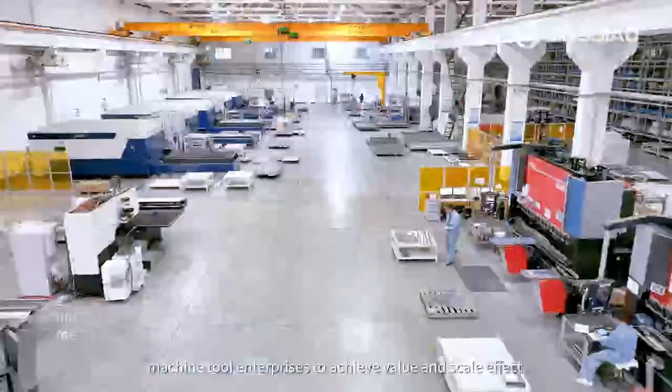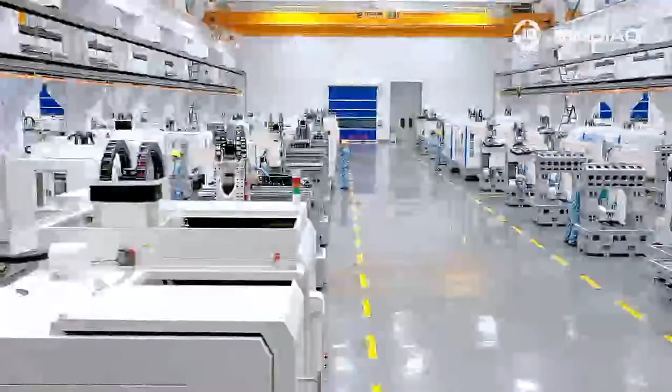Manufacturing capability is the most crucial factor for machine tool enterprises to achieve value and scale effect. Beijing Jingdiao has built large-scale precision CNC machine tool production bases with lean manufacturing capabilities in Beijing and Langfang, capable of producing 2,000 to 3,000 medium-sized Jingdiao high-speed machining centers and 3,000 to 5,000 medium cutting Jingdiao high-speed precision motorized spindles annually, which guarantees its rapid response to market demand.

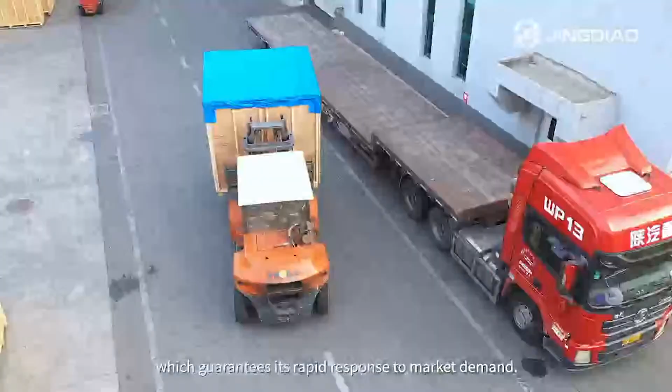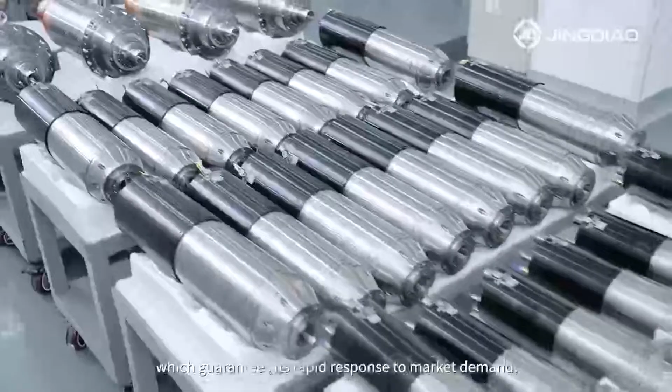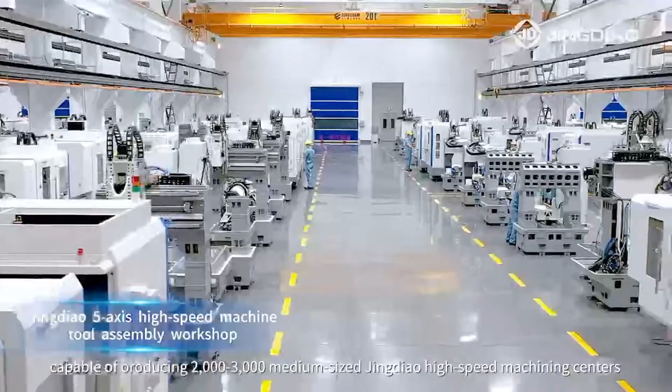Manufacturing capability is the most crucial factor for machine tool enterprises to achieve value and scale effect. Beijing Jingdiao has built large-scale precision CNC machine tool production bases with lean manufacturing capabilities in Beijing and Langfang, capable of producing 2,000 to 3,000 medium-sized Jingdiao high-speed machining centers and 3,000 to 5,000 medium cutting Jingdiao high-speed precision motorized spindles annually, which guarantees its rapid response to market demand.

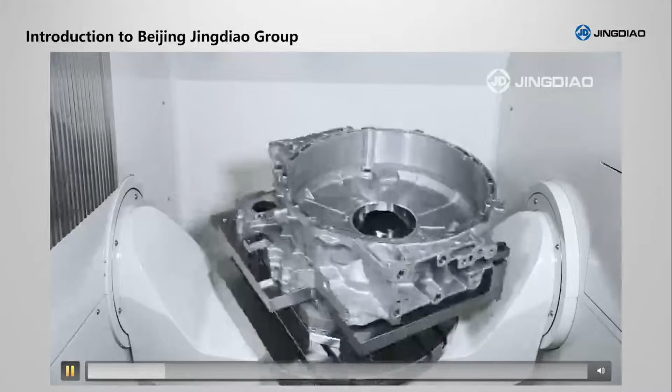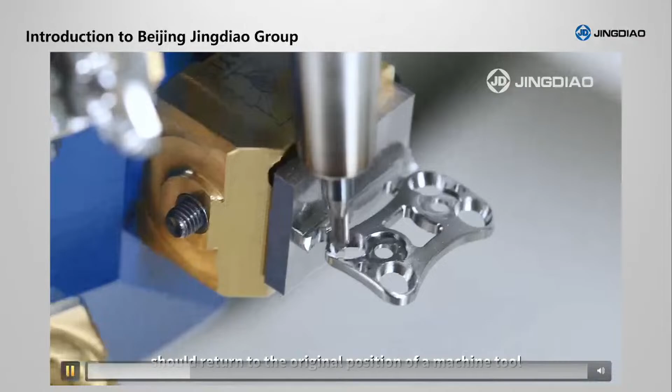As a manufacturing enterprise, Beijing Jingdiao is not an exception. Over the past 30 years since its establishment, it has always insisted that product development should return to the original position of a machine tool, a tool used for machining parts, and that it should focus on the original needs of customers, to be able to deliver on time, with quality and quantity. By providing customers with high-precision CNC machine tools and comprehensive CNC engineering services, it promotes the better development of both customers and the whole industry.

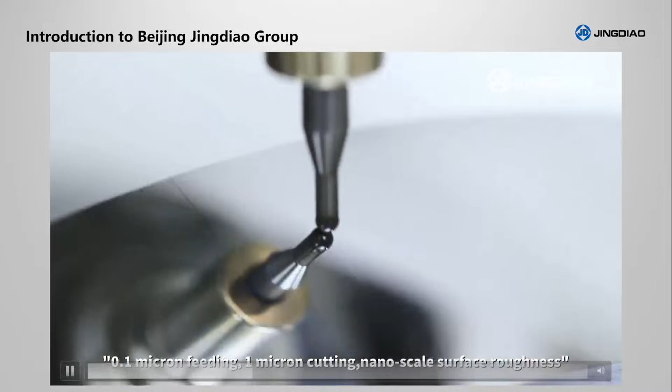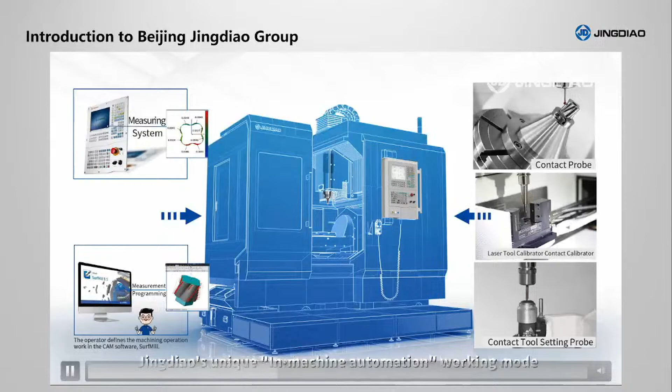Jingdiao precision CNC machine tools can stably achieve 0.1 micron feeding, 1 micron cutting, nanoscale surface roughness, to meet the needs of micron-level precision parts processing. Jingdiao CNC engineering services are based on Jingdiao's unique in-machine automation working mode, and provide mature CNC engineering solutions according to the needs of customers inside the industry.

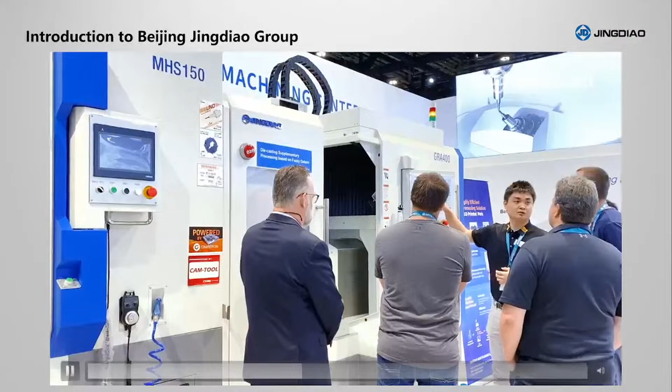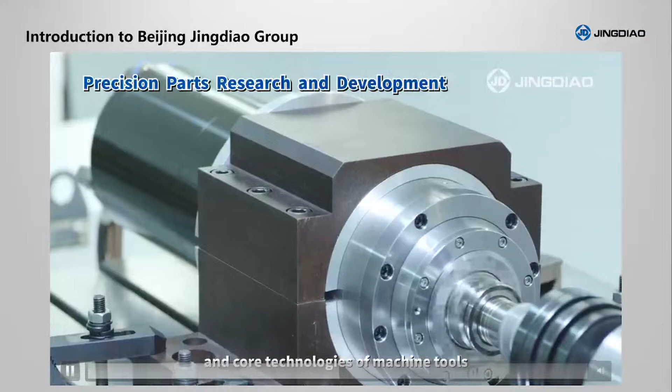In order to achieve the above goals, over the past 3 decades, Beijing Jingdiao has established a product R&D system that is close to the needs of customers, independently completing the R&D of key core components and core technologies of machine tools, and realizing the integration of electromechanical software.

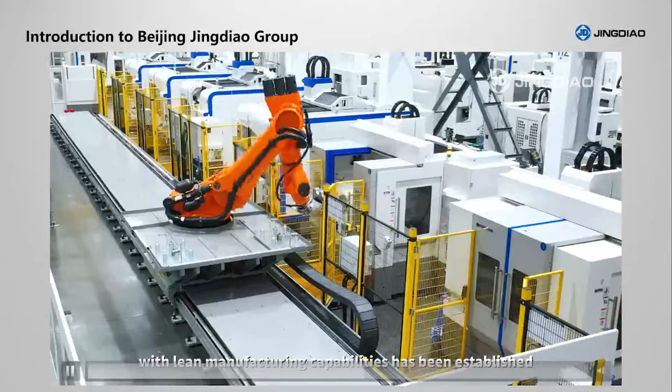A large-scale production system with lean manufacturing capabilities has been established, with a precision CNC machine tool production base of over 500,000 square meters. The machine tool host and key functional components are produced by self-developed equipment, with manufacturing and assembly accuracy controlled at the micron level.

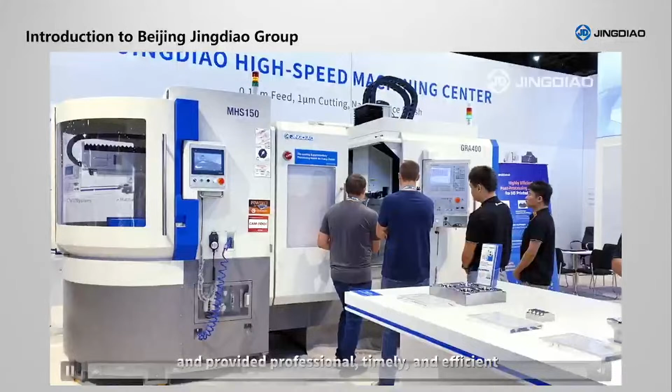We have helped customers make good use of the application technology service system of Jingdiao machines, established a technical service team of over 1,200 people, and provided professional, timely, and efficient technical services to customers at home and abroad. The human resources system of digital technology application is supported, and we have accumulated over 20,000 talents who master digital technology for the industry through independent education, school-enterprise cooperation, and hosting industry competitions.

Nowadays, Jingdiao high-speed machining centers have achieved large-scale application in the Chinese machining industry, helping manufacturing enterprises truly achieve micrometer-level parts large-scale and efficient processing.

Mountains and seas are not really barriers for sincere cooperation. In the future, we hope to work together with our European manufacturing partners to contribute our share to the development of the industry. Let's connect the world with precision machining. Join hands to create a brand new future.

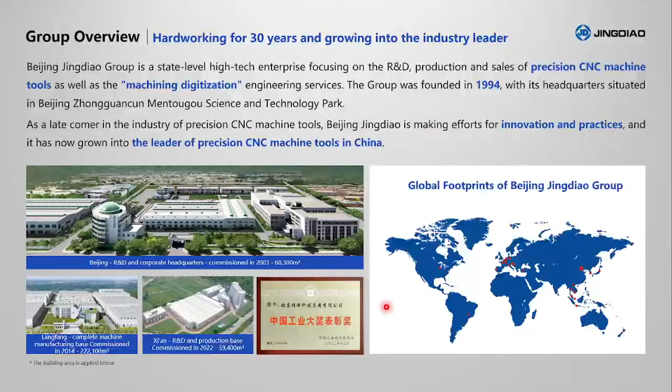These achievements are the result of 30 years of hard work since 1994, when the company was founded. Back at the foundation of the company, our first product was a CNC engraving machine. There is a small story I'd like to share with you related to why we developed the engraving machine. This story also lays the foundation for the development and business philosophy of our company.

We can also tell from this story what makes Jingdiao special and what advantages we've benefited from since the beginning. This story happens in the period of China's reform and opening up. I can only tell you this story orally because we don't have any pictures or videos, as back in that time in China, we Chinese people didn't use smartphones to record our daily lives. So we don't have any pictures or videos about this product or the company's history. So let's get back to the story.

At that time, in order to boost the Chinese economy, private individuals were allowed to operate businesses. The founder of Jingdiao was working in the field of precision machinery industry, yet his job was software development, as he had studied computer science and software engineering in university. Every time he developed a new piece of software, he needed to wait for the corresponding circuit board to do the experiment.

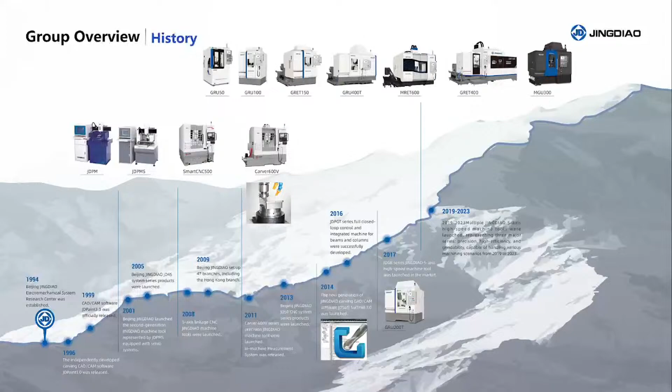The main products of Jingdiao are Jingdiao Precision CNC Machining Centers, including Jingdiao High-Speed Machining Centers and Jingdiao CNC Machining Centers, both of which are independently developed by Beijing Jingdiao. So far, we have launched more than 300 models on the market, with over 10,000 customers holding 120,000 units of Jingdiao machines. The products are widely applied in precision molds, precision parts, 3C structural components, medical devices, automotive electronics, and other industries.

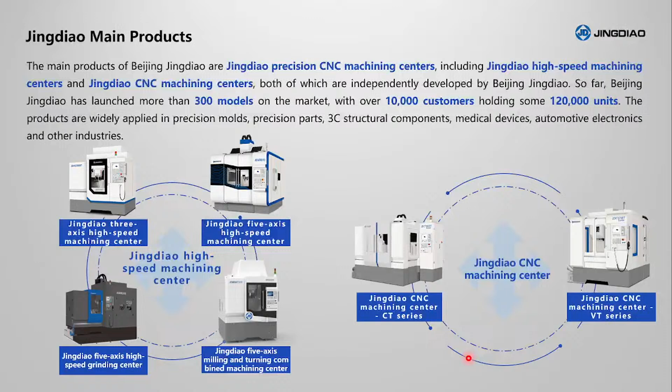The company boasts independent intellectual property rights of all of them and has realized mass manufacturing for these applications.

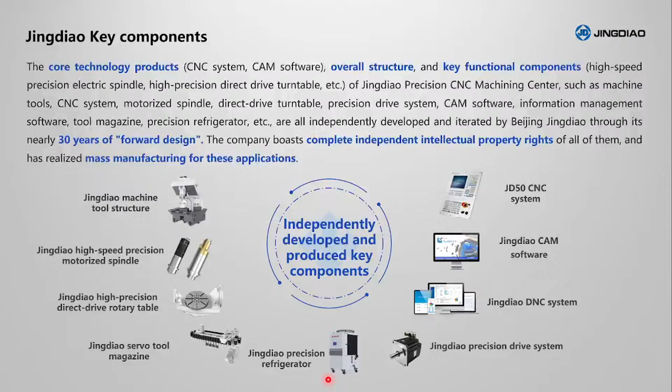Based on the complete R&D system covering mechanical, electrical, and software aspects, Jingdiao has formed two outstanding advantages. The first one is the machining accuracy of Jingdiao high-speed machining centers can stably reach micron level. This video shows some test parts that can be batch produced by Jingdiao high-speed machining centers. Let's watch the video first.

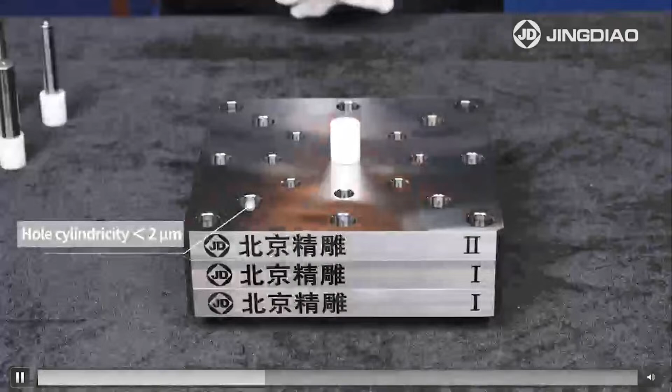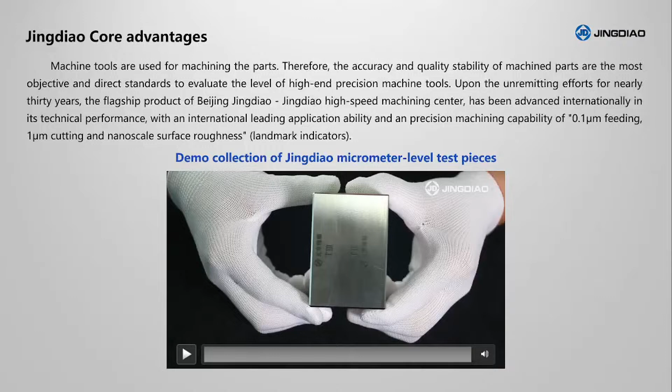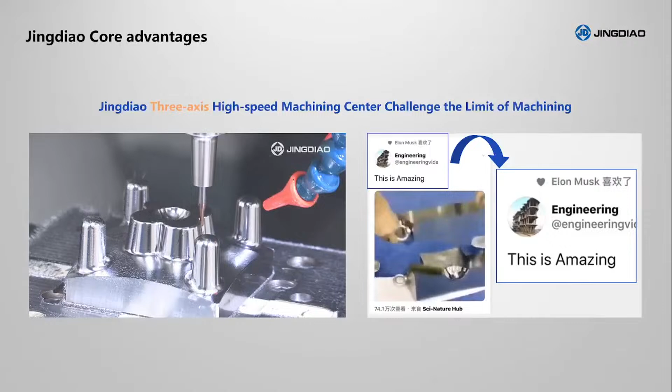I'd like to introduce the following two parts in more detail. The first pair of parts are machined in Jingdiao 3-axis high-speed machining centers. First, let's watch the video.

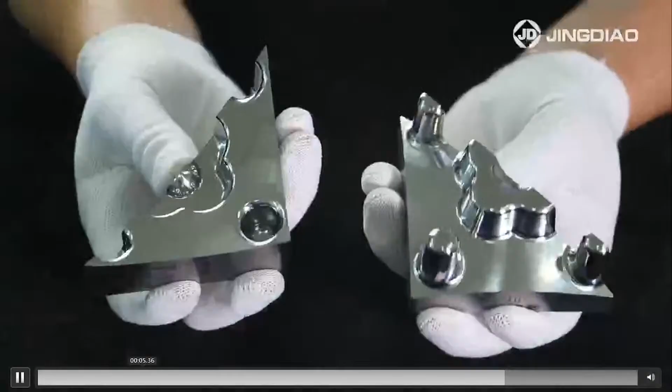We can tell from the video that this is a pair of parts made from a concave part and a convex part, and each pair can fit in 4 directions, and different pairs can fit interchangeably, also in 4 directions. When we cut these two parts along the diagonal, the two parts fit seamlessly, as the fitting accuracy is less than 5 micron. This test part can be batch produced with Jingdiao 3-axis high-speed machining centers.

The video went viral on Chinese social media, watched more than 10 million times. When we posted the video on foreign social media, it also won likes from some really famous people.

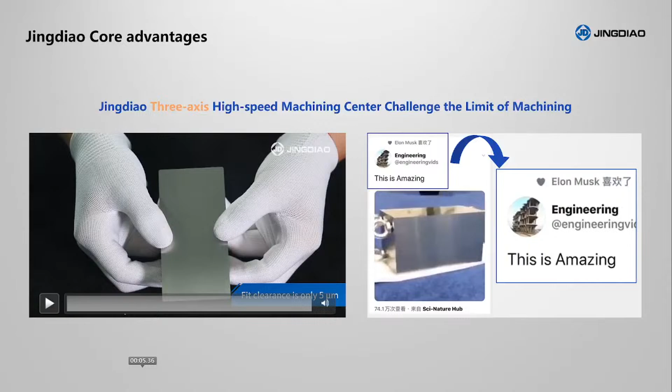The next pair of parts is also seamless fitting. What's different from the first pair is these two parts are machined with Jingdiao 5-axis high-speed machining centers. Let's watch the video.

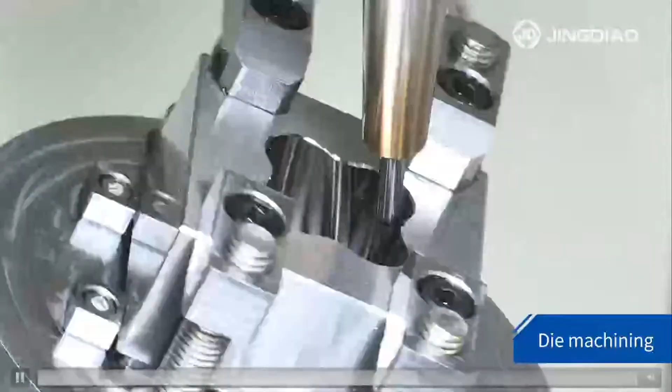We can also tell from this video that the parts are combined from a concave part and a convex part. A single pair can fit in 4 directions, and different pairs of these parts can fit interchangeably as well. The fitting accuracy between these two parts is 5 micron.

In order to prove that the fitting accuracy is only 5 micron, we also did a small experiment in this video. We fit these two parts together and then put them on a non-magnetic part. Because the fitting accuracy is only 5 micron, it creates a vacuum space between the two parts, and it can lift a non-magnetic part, showing that the fitting accuracy is really precise.

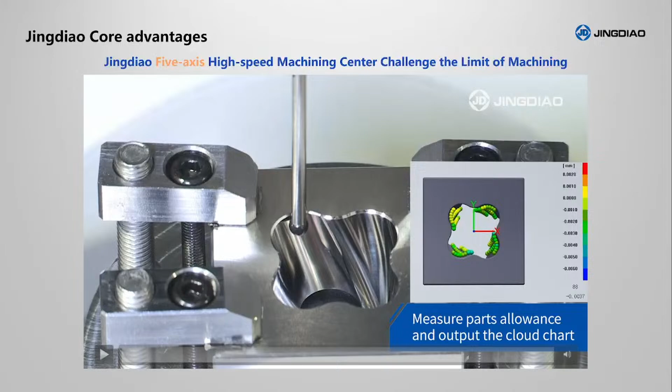So these two pairs of parts are the most vivid examples of the micron-level machining accuracy of Jingdiao high-speed machining centers, and this is the first advantage Jingdiao machines have. As for the second advantage, it's quite unique, and we're very proud because only Jingdiao can realize it.

Before the introduction, I'd like to invite you to watch a video first.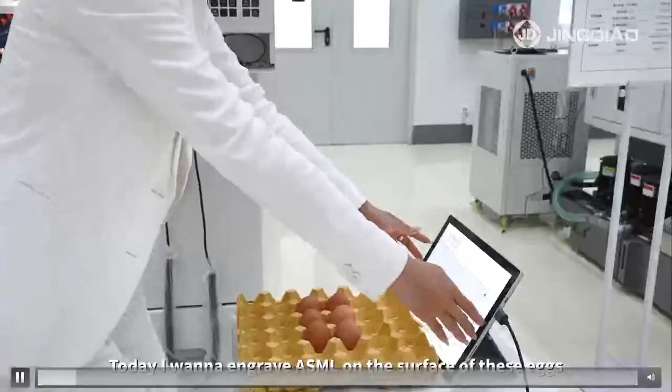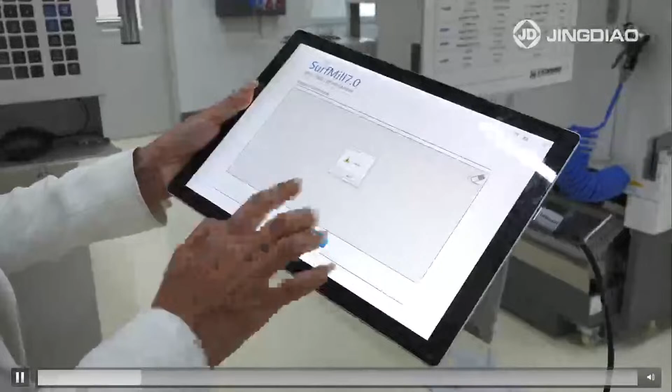These are eggs I just bought from the market. Today I want to engrave ASML on the surface of these eggs. First, I will write down ASML in the software and press this button to generate the NC program. Now the program is in the control system. I will randomly select an egg and clamp it in the machine tool.

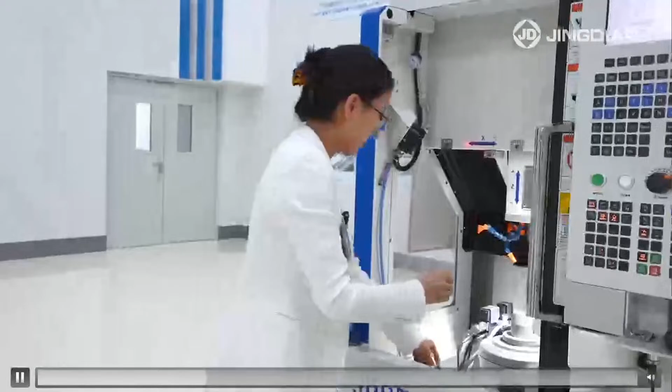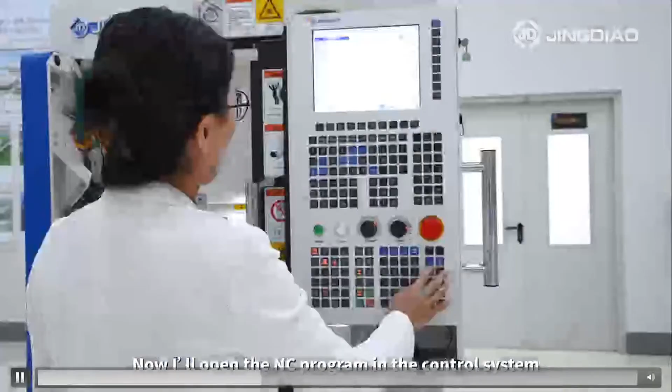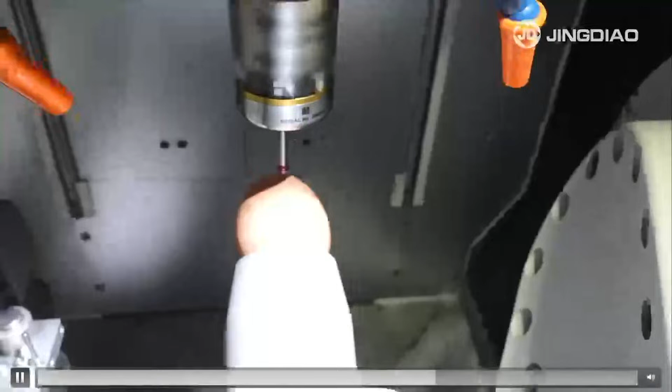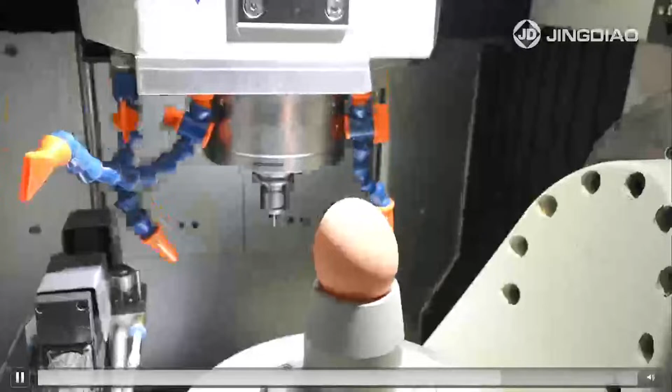Now I will open the NC program in the control system. Press the start button. Now let's wait a few minutes. The egg will be finished. Now the egg is finished. Let's see how it looks. ASML has already been engraved on the surface of this egg.

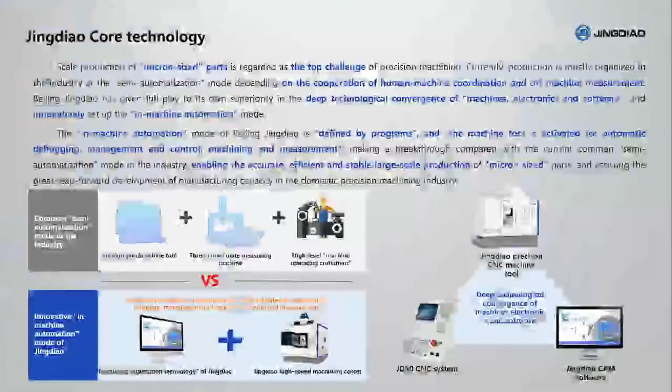In this short video, we are demonstrating Jingdiao's IM technology through a very interesting case, egg engraving. If we replace the egg with precision parts, this technology also works. We will introduce this technology in detail tomorrow. What we want to show today is based on this technology, a unique machining mode introduced to the precision machining industry. We call it Jingdiao in-machine automated production mode.

The reason why this mode is essential for the market and customers is we notice that in precision parts machining, machine tools are not cutting continuously, as a lot of work needs to be done by the operator. For example, setting the coordinate of the part, measuring the part's dimensional accuracy or allowance, setting the length of the cutting tools, and compensating the radius of ball-end cutting tools if you want to realize micron-level machining.

This work not only influences continuous machining, but also affects the accuracy of the parts, because in precision machining, the environment in the machine needs to be quite stable. Based on all these reasons and the comprehensive R&D system Jingdiao has, we introduce the in-machine automated production mode to our customers' workshops in the precision industry.

This mode, as I just mentioned, is based on Jingdiao IM technology. Customers can define all the works I just mentioned in Jingdiao CAM software, as we can see here. Jingdiao control system will give instructions to the sensors we installed in Jingdiao high-speed machining centers.

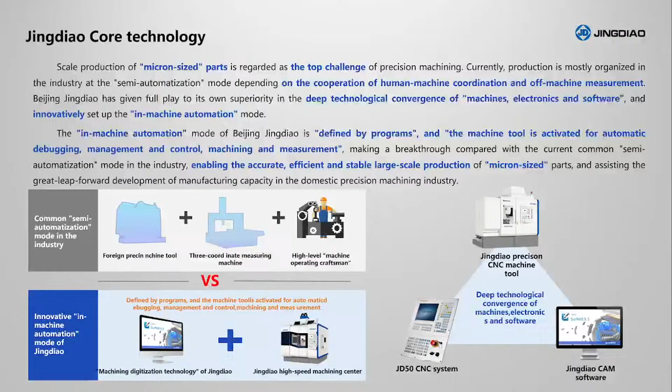Thus, in precision machining, the operator only needs to fix the part in the machine tool, press the start button, wait for it to finish, and unload the part. The whole machining process is automated. The working rate will increase, and the environment in the machine will not be affected by human factors, so that large-scale production of micron parts can be achieved.

With Jingdiao high-speed machining centers and its in-machine automated machining mode, we have over 2,000 customers in 30 precision machining industries, and over 60 leading enterprises in these industries use Jingdiao high-speed machining centers. These customers are the basis we can develop sustainably. These are some industries using our high-speed machining centers, and some really famous customers from each industry.

Beside the recognition from our customers, to promote Jingdiao's development and provide high-quality machine tools to our customers, we have already built our own industrial system, including R&D, manufacturing, and service system.

First, let's take a look at the R&D capabilities of Beijing Jingdiao. The outstanding R&D capabilities is definitely the driving force for the continuous development of a company. This is also the reason why we built a comprehensive, independent R&D system covering core technologies, complete machines, and core components. Now we can launch more than 5 new machine tool models every year.

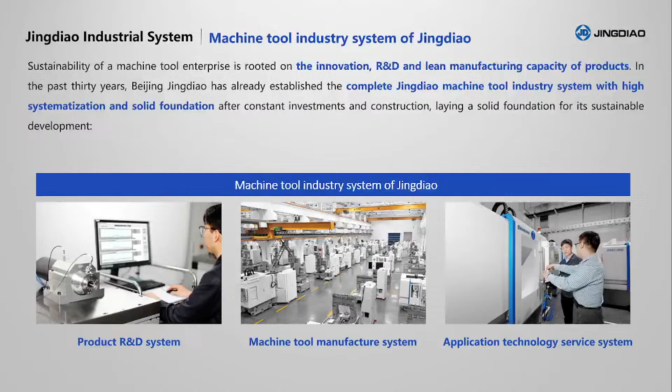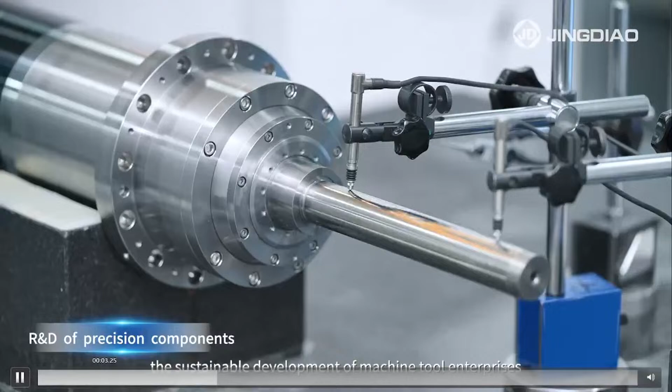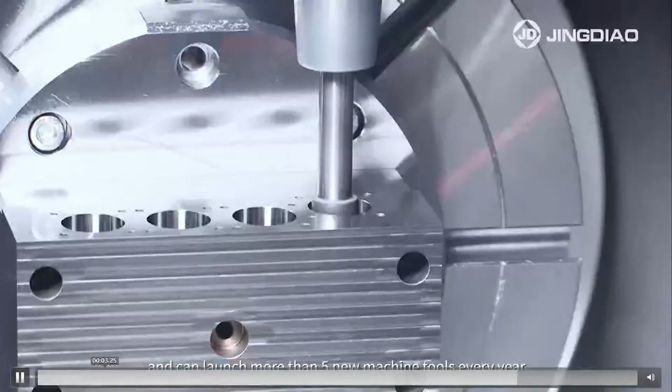Excellent R&D capabilities are the impetus for the sustainable development of machine tool enterprises. Adhering to the R&D concept of supporting customers to efficiently use Jingdiao machines, Beijing Jingdiao has set up a basic technology foundation. It reinvests more than 8% of its annual income on technology and product R&D and can launch more than 5 new machine tools every year to meet the diversified needs of the market.

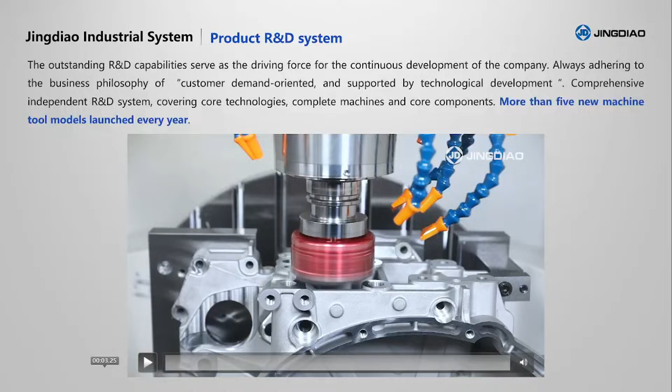As we saw in this video, our R&D directions include the mechanical structure of the machine tools, software development, and automation solution development for our customers, almost covering every aspect of the machine tool. We also invest a lot every year in our R&D system—around 8% of our annual income—so that we can provide 5 new machine tool models every year to our customers.

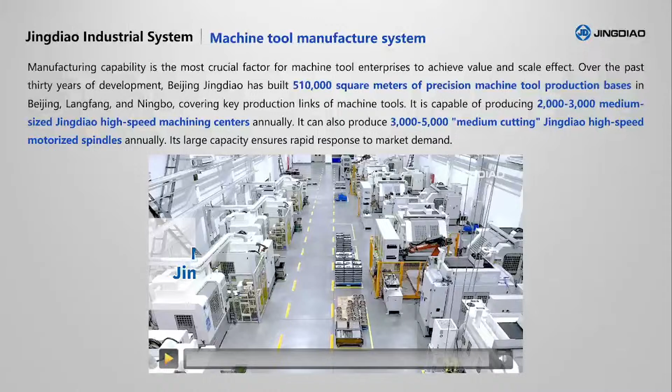The next very important capability of a machine tool company is manufacturing capability, because this is what allows us to realize large-scale production of our machine tools. Let's watch the video first to get to know what Jingdiao's manufacturing system includes.

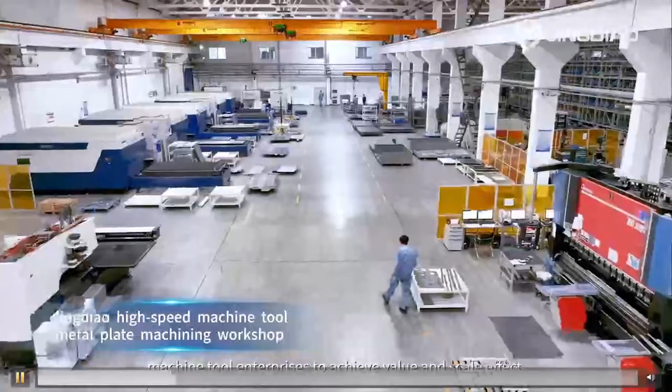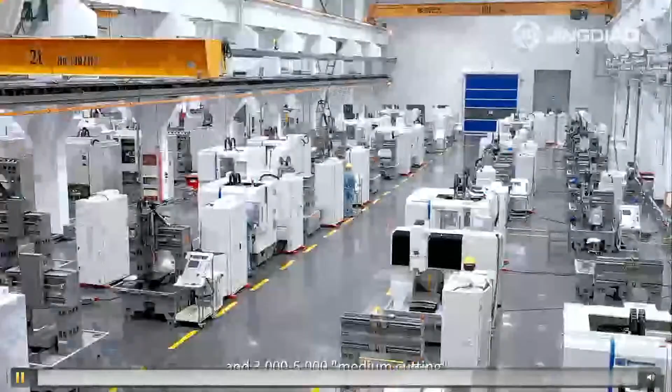Manufacturing capability is the most crucial factor for machine tool enterprises to achieve value and scale effect. Beijing Jingdiao has built large-scale precision CNC machine tool production bases with lean manufacturing capabilities in Beijing and Langfang, capable of producing 2,000 to 3,000 medium-sized Jingdiao high-speed machining centers and 3,000 to 5,000 medium-cutting Jingdiao high-speed precision motorized spindles annually, which guarantees its rapid response to market demand.

What I want to stress here is that from this video, we can tell that Jingdiao has our own casting factories to produce the structural parts of the machine, and our own sheet metal factory to produce the sheet metal of the machine. We use our own Jingdiao machine tools and automation units and lines to do the finishing process of key parts of the machine, such as columns, gantry parts, and turning of rotary tables.

Besides the video, I want to share this information: the manufacturing capability is around 2,000 to 3,000 per year for Jingdiao high-speed machining centers, and 3,000 to 5,000 per year for Jingdiao high-speed motorized spindles, in order to meet the customers' needs and also to meet the market needs in China and abroad.

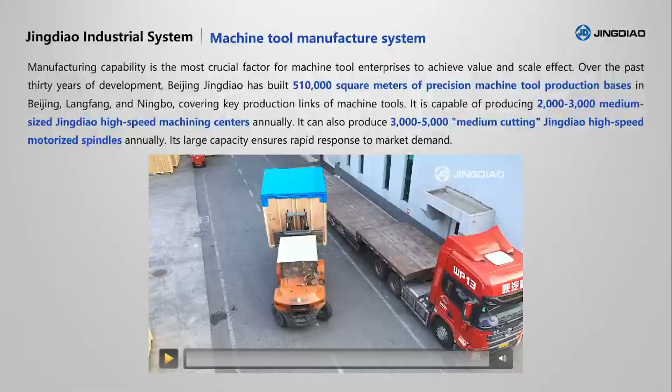In our manufacturing system, as I just mentioned, we have a really comprehensive manufacturing system covering not only die casting manufacturing, but also sheet metal factories. We also use our own machines to do the finishing process of our key parts.

We also use manual scraping to maintain the flatness of the machine body before assembly. These are what we do to make sure the machining accuracy of key parts of Jingdiao machine tools and the assembly accuracy of Jingdiao machine tools can reach micron level.

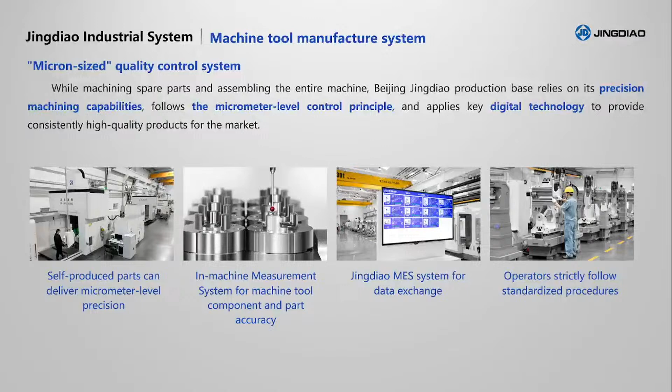These pictures also show some other methods we use to reach micron level precision of parts on Jingdiao machine tools. For example, we also use Jingdiao IMIM in machine tool parts producing. We also use the Jingdiao MES system to manage the assembly process, to make sure it goes well and is done by standardized processes. We also have very detailed and standardized working procedures that workers need to follow strictly during assembly. These are all methods we have to make sure the precision of Jingdiao machine tool parts and assembly can reach micron level.

And the third very important system in our industrial system is our service system. We built this system because we want to make sure that our customers can use our machine efficiently and stably. That's the reason why we built a very complete application technology system to help our customers solve their problems on site together. So far, we have around 1,200 engineers that can provide technical services to our customers in China.

And right now, we are also working on the application technology service center in Germany so that we can provide timely service to our customers in Europe in the very short future. For example, we want to help our customers realize precision milling, precision grinding, and also efficient composite machining, as well as in China.

As we build this comprehensive industrial system, it can support Jingdiao to build such high precision machine tools, and also to provide really good quality products to our customers, and also to help our customers solve their precision machining problems and fit their needs.

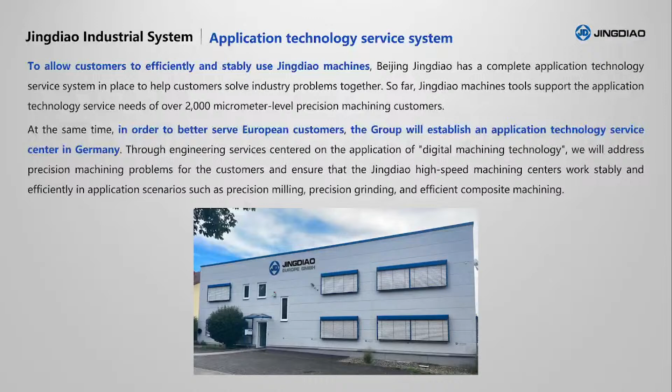In the future, we really want to have deep cooperation with the customers from Europe, and from maybe some other suppliers or our friends. So that's today's brief introduction.

Tomorrow, at the same time, we will introduce Beijing Jingdiao IMIM technology and also its featured application. We showed a short video today about egg engraving, and as I mentioned before, IM can not only be used in egg engraving - this is just an interesting case we want to introduce to attract customers' attention. But in real precision machining, IM is really a helpful technology that can help us improve the machining accuracy. We will introduce this technology in detail from 5 aspects.

The first one is with IM, we can define the coordinate system of complex shaped parts in not only 3-axis machining, but also in 5-axis machining. Also with IM, we can achieve shape-followed machining in batch production, just like the egg engraving cases. And also we can use IM to achieve in-machine inspection and judgment of parts' accuracy.

This work is usually done by a 3-coordinate measurement machine nowadays, but with IM, we can do it in-machine in our Jingdiao high-speed machining center. The 4th aspect we want to show about IM is that with IM, we can do tool measurement and compensation - not only flat end tools, but also ball cutting tools, and also the measurement and compensation of grinding wheels in precision grinding.

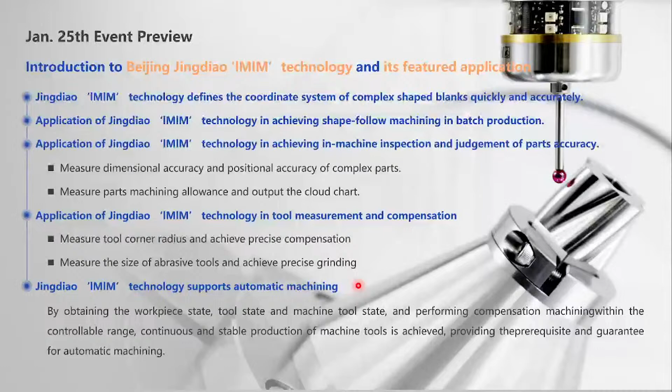And the last aspect we want to introduce is how with IM we can support automatic machining. Because Jingdiao not only provides machine tools, but also provides automatic solutions to our customers. But in order to realize automatic machining, we need to first solve the problem that the machines don't run continuously. So with IM, we can realize in-machine automatic machining first, and then realize automation, like an automation line or automation unit, in the next step.